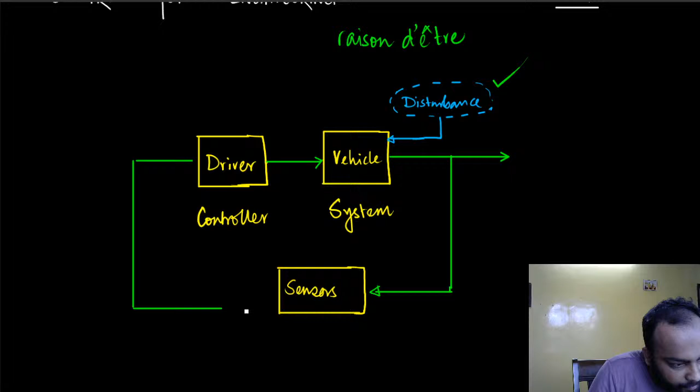How well the vehicle is behaving, where it is going, whether or not it is obeying your command, whether or not you are doing it right - these sensory perceptions will give you an idea of that, and that is what you need as the driver. So this is something you need as the driver, but there is a small problem. The driver needs to be able to see what is happening, right? That's understood. Pretty simple.

The problem is that here we do not really have a mathematical way of representing the mindset of the driver. Imagine this entire single line is representing the speed of the vehicle. So imagine the driver wants to run the vehicle at a speed of 60 km/h, and accordingly the driver would press harder on the accelerator, and the vehicle is accelerating, so the speed of the vehicle is increasing. The driver needs to keep track of the speed, and if the speed exceeds beyond 60 km/h, then the driver needs to release the accelerator pedal accordingly, so that the speed reduces. And if the speed again falls behind 60 km/h, then the driver would again slightly press on the accelerator pedal.

This kind of adjustment is possible only if the driver or the controller is comparing the output with a certain reference. These kinds of adjustments are possible only if the controller is comparing the output of the vehicle or the system with a set of prefixed values, or with a set of reference.

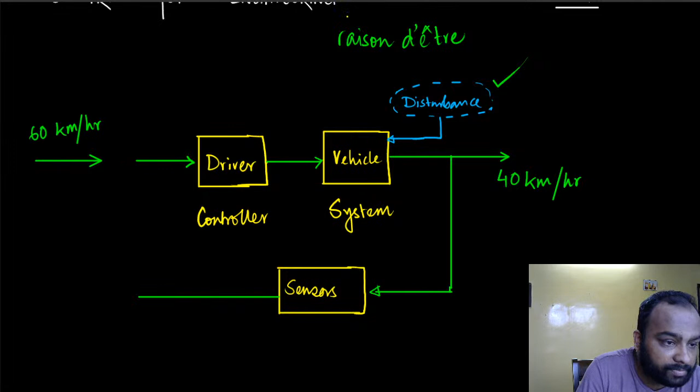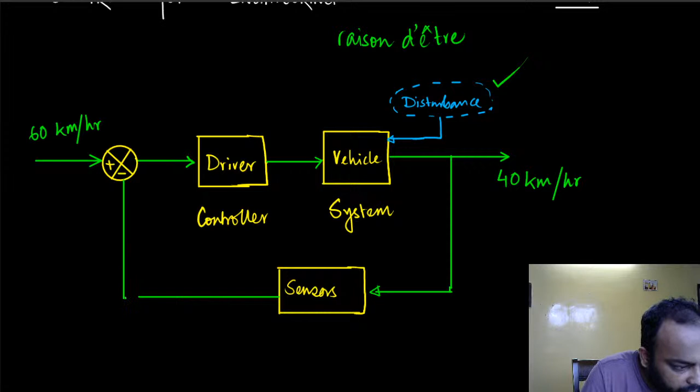But how would I know that? I as the driver would know that by simply comparing the reference value with the output. So we have a special block diagram symbol here, and this symbol is a very special symbol. It simply represents that whatever we are reading here, we are subtracting with the reference. So this is the reference value, and we are subtracting the output from the reference value. So this is plus and this is minus - that is the indicative here. So we are subtracting them accordingly.

So here apparently we would have the knowledge that my vehicle is running 20 kilometers per hour slower than how fast I want it to go. So accordingly I will press harder on the accelerator pedal - rather, the driver would press harder on the accelerator pedal. I think this is understood.

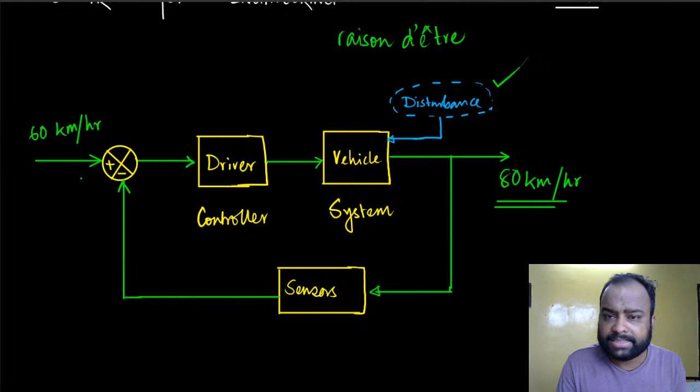If not, say for example this is instead 80 kilometers per hour, but I want to go at 60 kilometers per hour, then the difference would tell me that we have a negative change required - we need to reduce the speed. This difference here, if I measure the difference or compare the difference, and this block is literally known as a comparator - it compares. This comparator would tell the controller or the driver that I need to reduce the speed. Maybe I need to release my leg from the accelerator and slightly press on the clutch and the brake. Maybe, I don't know.

Okay, so I have to reduce my pressure on the accelerator. That's understandable, right? With that knowledge, I think it's clear that this comparison needs to be done. For the driver, this comparison happens inside the driver's head. He looks at the sensors, how fast he's moving, and he also knows how fast he needs to go. Accordingly he compares, he does this comparison inside his head. So this is a comparator, right?

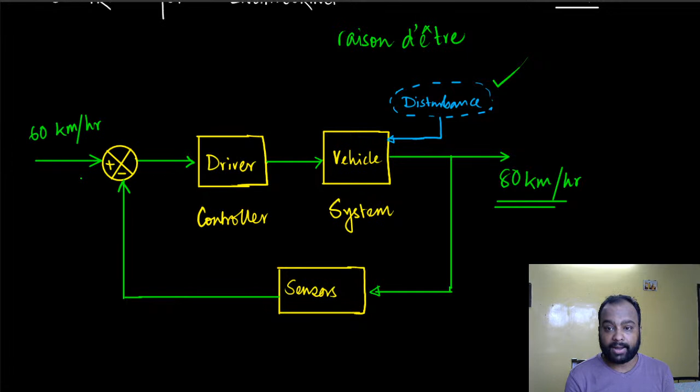This is a very simple block diagram of a control system. So let me now copy this diagram to create a more generic one.

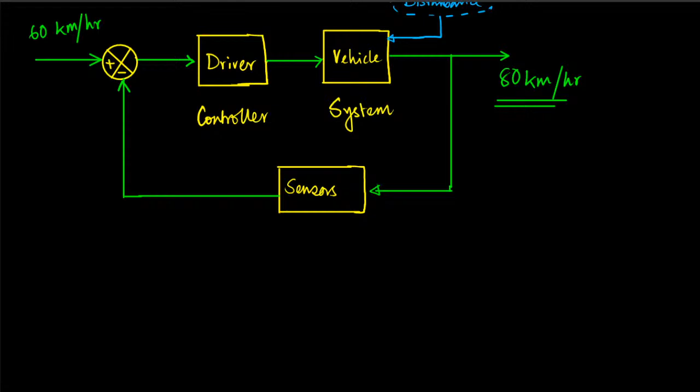Let's proceed, I don't think you have any queries. All right, so the system we are controlling, let me just zoom in a bit. The system we are controlling, we call that a controlled system.

So let me just introduce to you the terminologies we actually have. All right, so this is the controlled system, right?

All right, so the transfer function, I shall introduce to you the term transfer function, but the mathematical description of the system, let's represent that with, say, G2 maybe. So this is the mathematical description. This could be a transfer function model, this could be a state space model, this could be any other type of model. But this is a mathematical description as far as we are concerned.

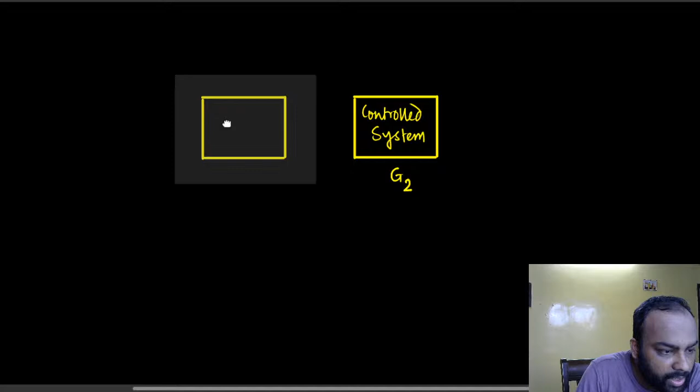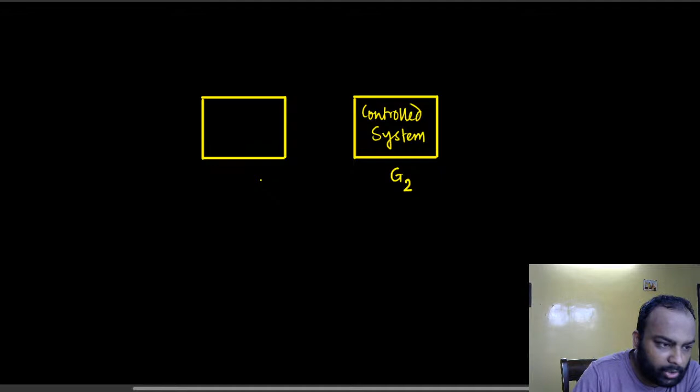Then what we have is that we have a controller, right? Instead of calling it a controller, I shall call it control elements, because a controller itself actually has several other components as well. We shall learn all those things later on, but we shall call it control elements. Let's call the mathematical representation of this, say, G1 maybe.

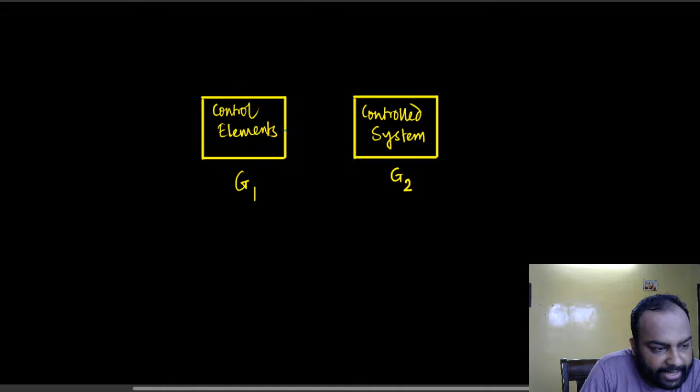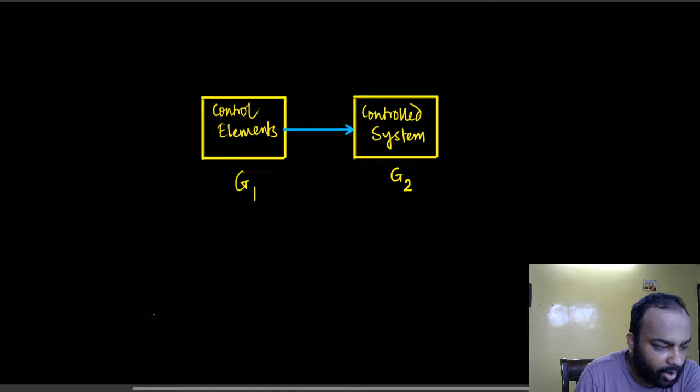And from that, this set of control elements is actually sending a signal to the controlled system so that it can actually control the controlled system. Is that understood? So this signal is being sent from the control elements to the controlled system, and they behave accordingly, right? So this is the human driver in this particular scenario, and the vehicle.

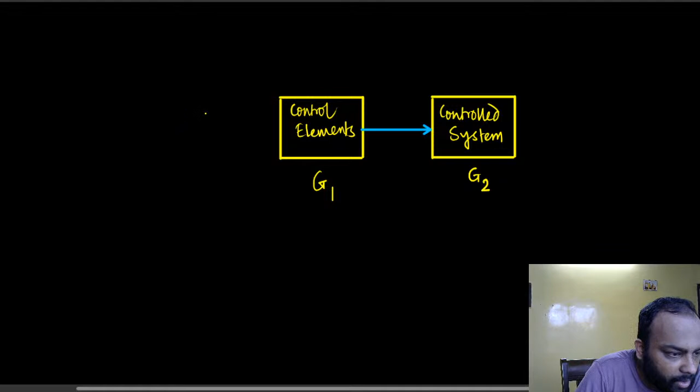Then you have a mechanism for finding the output of the controlled system. So let me just draw the output of the controlled system. This is the output of the controlled system, for example, and this output of the control system is being read by a set of sensors, right? Set of sensors, something like that.

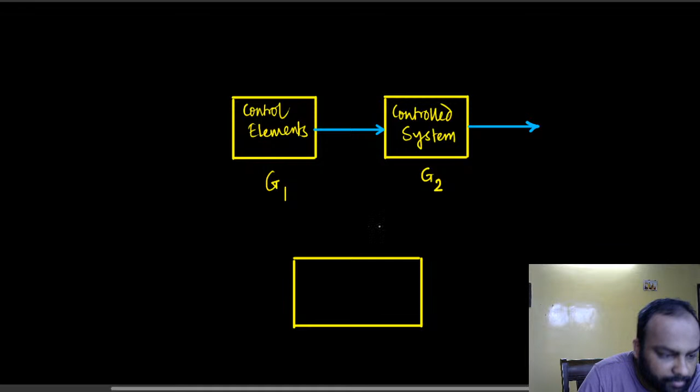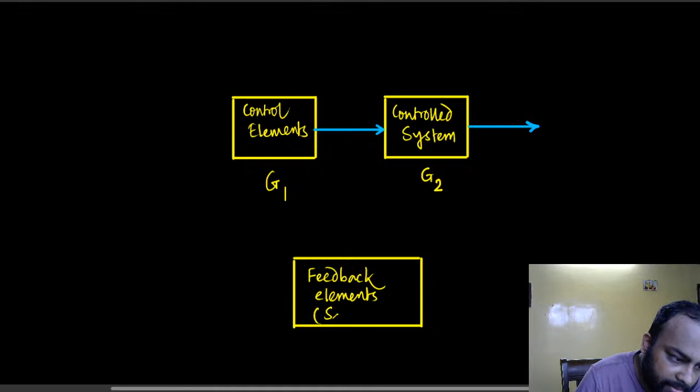So those set of sensors are going to be called, I shall call them feedback elements. Usually they contain sensors, right? So these are the feedback elements. These feedback elements would receive signals from the controlled system, right?

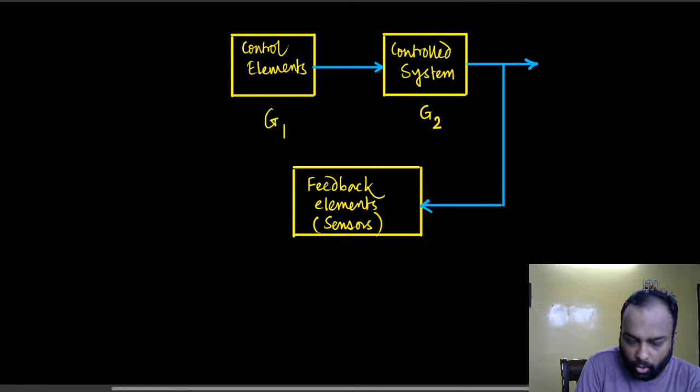So basically what the controlled system outputs is received by the feedback elements, and that is being fed back to the control elements, and it's the responsibility of that part to compare what we get from the feedback elements and what we want. So we have something called a reference input.

So this is the reference input, and this reference input is being compared with what we get from the feedback. Just like our previous example, we have a plus, we have a minus here, okay. So this is basically a comparison happening. This comparison, what we get after the comparison - so this is the reference and this is what we have from the output of the control system - actually goes into the control elements.

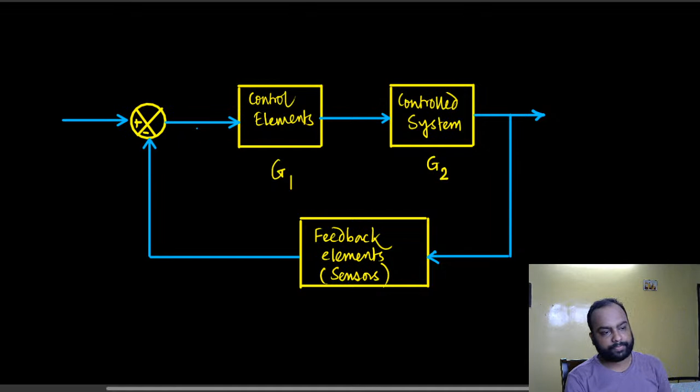All right, up to this part I think is understood by you, right? Now often what happens is that we do not really have a reference input as such, right?

So try to understand, think about the human driver here. For the human driver, in our example, the reference input was a certain amount of speed at which you wanted to move. So the reference input was a certain amount of speed, right? But try to understand that in your mind you have an idea about speed, and that is being somehow translated by your brain into a certain comparison with what you get from the feedback elements.

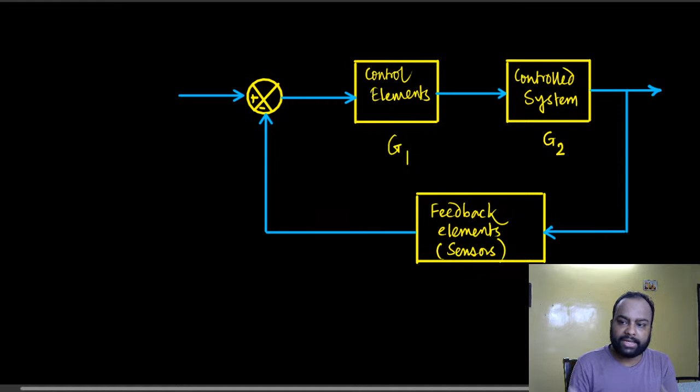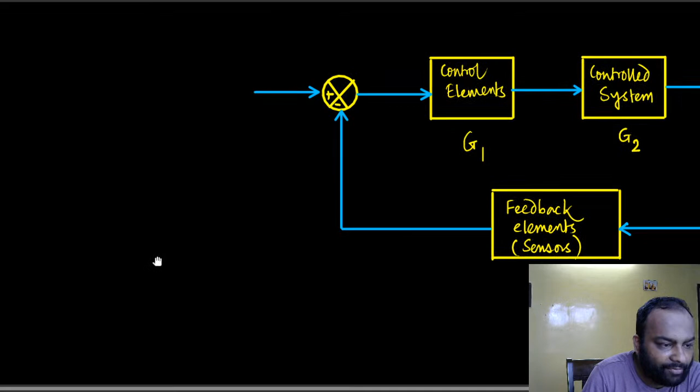How fast you want to move is an abstract idea in your brain, and that abstract idea needs to be materialized into a certain numerical value. So what you essentially have, instead of this reference input, is a set of commands that are in your head. The command would be something like go faster, or maybe go slower, something like that. This kind of command is something you have in your mind.

And from there you are generating the reference input. So you are generating the reference input by means of having some command inside your head. The command could be go faster or go slower, something like that. So let's write down the names now. For example, this is called the command signal, represented with V. It's a good example for our purpose because we are considering the velocity or the speed to be our command signal.

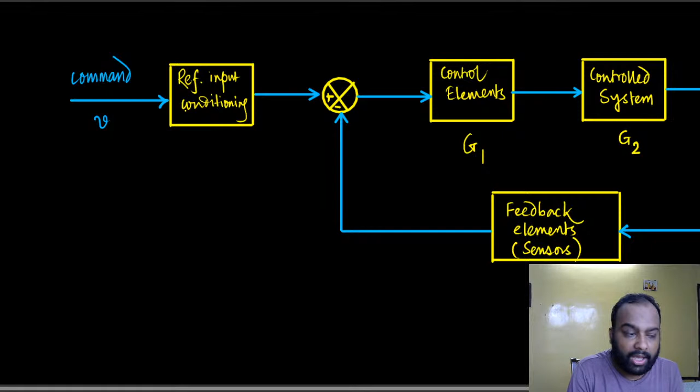And this block here is a system. It's called the reference input conditioning elements, or rather reference input conditioning, a set of reference input conditioning elements. What signal this one generates is the reference input. So this is the signal we call the reference input. Let's call everything with capital names. So this is V, and the reference input itself is called R.

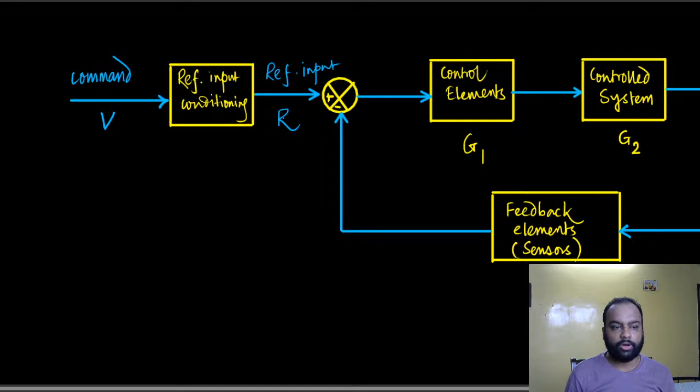Of course this is called the output of the system, the controlled system's output, but in our control system nomenclature this is called the controlled variable. The output of the controlled system, for our example it was the vehicle, the output of the vehicle would be called the controlled variable, or controlled variables for that matter. So this output is actually the controlled variable, the output of the system.

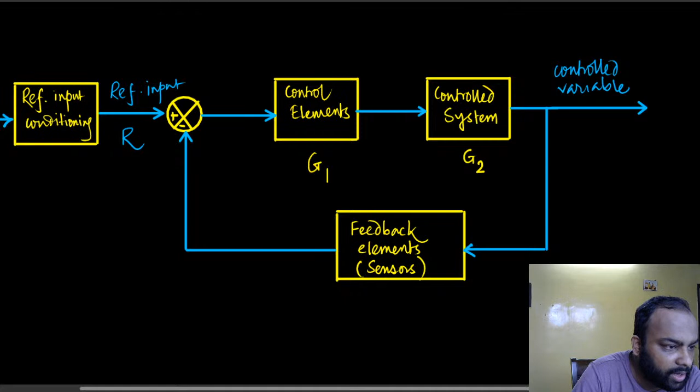So this controlled variable has a name. We usually call this C. So this controlled variable is again the output of the controlled system. This is being received by the feedback elements.

Now feedback elements would have a transfer function or some sort of a mathematical model, could be a state space mathematical model or something like that. We call its transfer function or its mathematical description H. This is again standard nomenclature. And the output that we receive from the feedback elements, and again feedback elements would include your eyes, your ears, the entire display panel of your vehicle, everything, we call that the feedback signal.

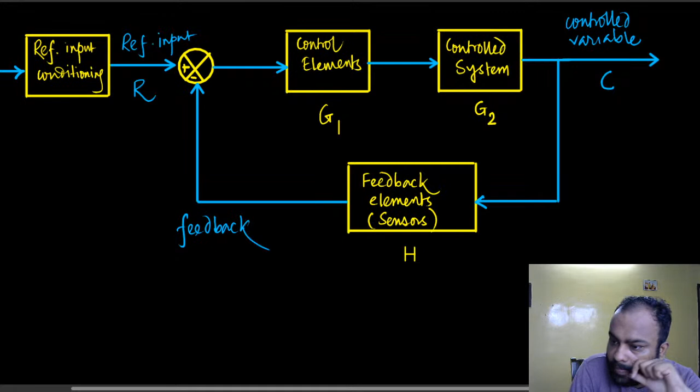So this is the controlled variable, and after going into this, what we have is the feedback signal. So this signal is the feedback signal, and the feedback signal is called capital B. Understandable, right?

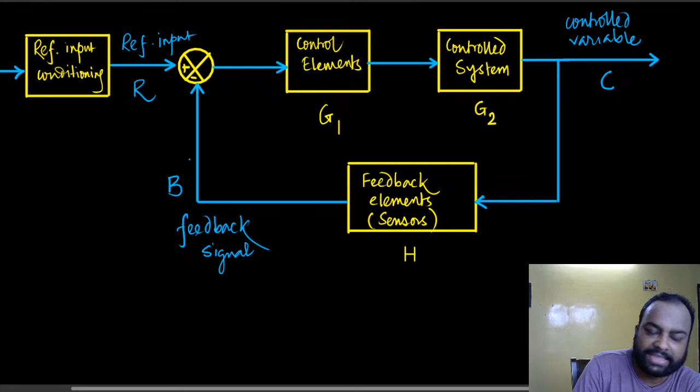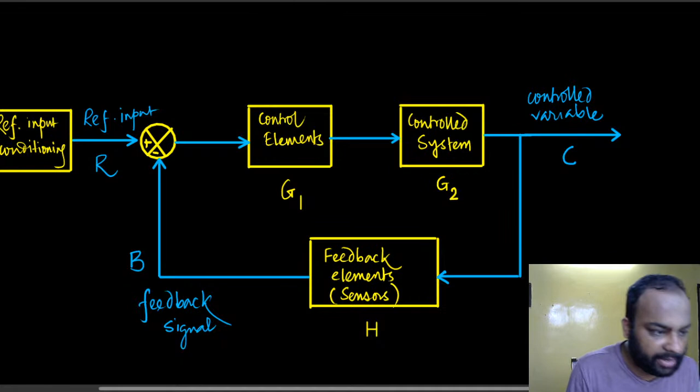So this comparator is comparing the reference input with the feedback signal. Comparing means just subtract them, so that gives you the difference, how much you are yet to go, or how much you have to release. So this is basically a subtraction, simple subtraction. Comparison means subtraction in this particular scenario. So this difference between the reference input and the feedback signal is called the actuating signal. This signal that we have here out of the comparator is called the actuating signal.

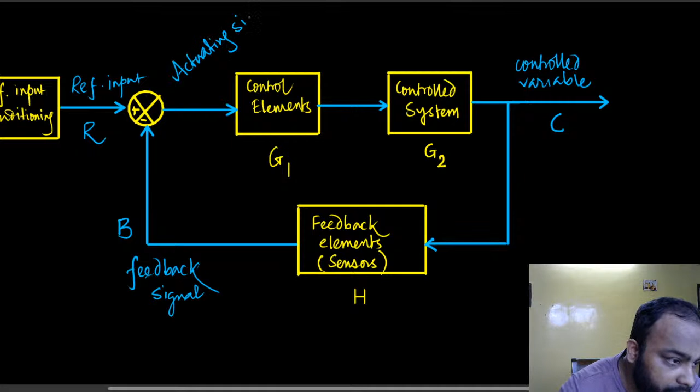This signal that appears here is known as the actuating signal, and it has a symbol of E. Now it has a better name. This shows you how much you still have to go or reduce in terms of your reference input and the control variable. So what is the difference between what you have and what you want? That difference is known as the error signal, often called an error signal. So I would rather call it the actuating error signal.

Actuating error signal. And since this is the error signal, we have a name E. So the actuating error signal is the difference between the reference input and the feedback that we receive from the feedback elements, and that actually goes into the control elements, namely the driver himself or herself.

Now based on whether I have to go faster or slower, this will tell me the difference between how fast I want to go and how fast the vehicle is currently moving in our particular example. Accordingly, the driver will decide whether to press harder on the accelerator or release it. So the driver receives a signal, and that signal is the difference between the speed at which the driver wants to travel and the speed he is currently traveling at.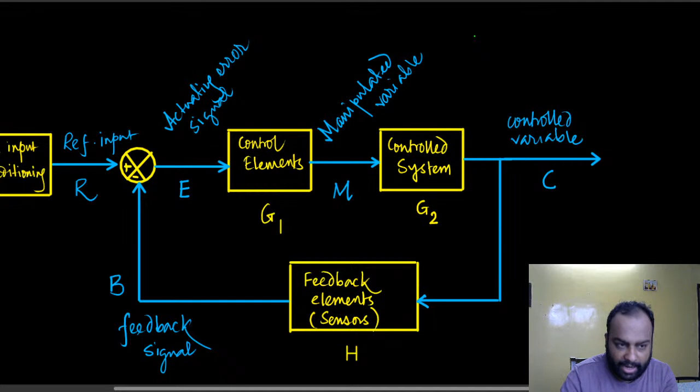But always keep in mind that none of these would be there if there wasn't any disturbance. The disturbance is all those non-idealness in the scenario. Everything that is non-ideal, from the perspective of the control system, can be considered a disturbance. So for my particular scenario, this is disturbance, and the disturbance comes externally into the system I am controlling.

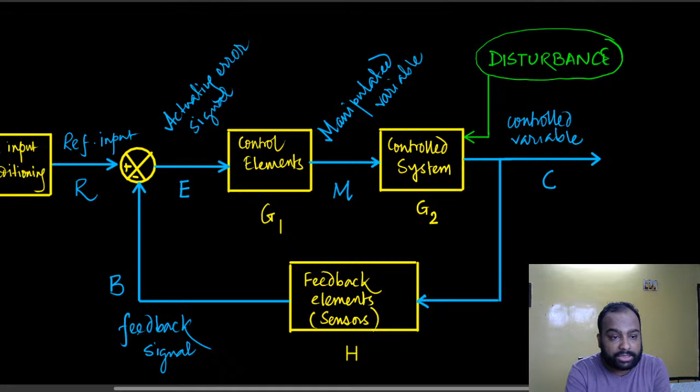This is a very important point to note. Again, all these control elements and feedback mechanisms need to exist simply because there is a disturbance. Nothing is ideal in nature. So the disturbance is actually feeding into the control system. We call that capital D.

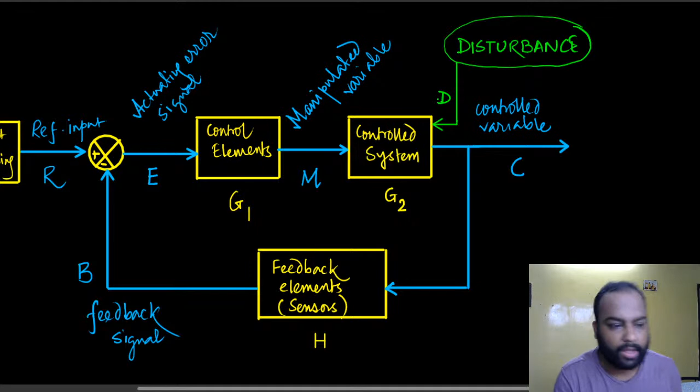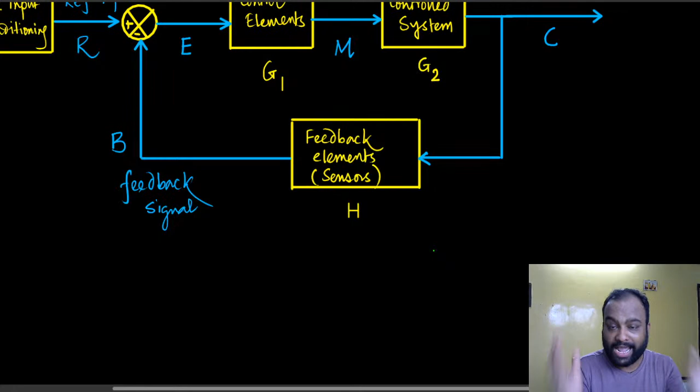But along with that, there is something else. You might have heard these terms, disturbance and noise. Often what happens is, and this is mostly the fault of the teachers, many teachers would teach you that disturbance and noise are the same thing, and you would get this kind of wrong idea. But the point is, these two terms, even though they have similar meaning in English literature, they have completely different meaning in engineering.

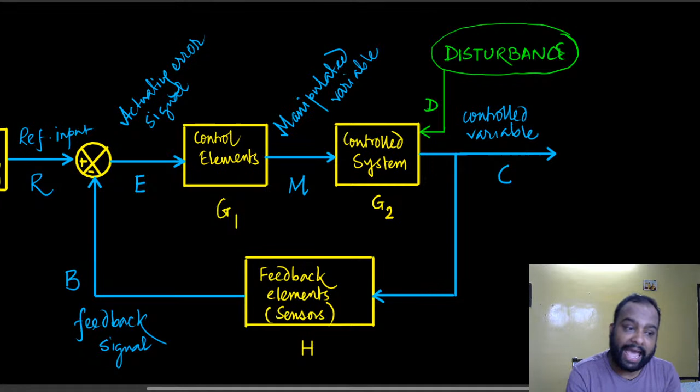They do have completely different meaning in engineering. Disturbances are those non-ideal situations that affect the controlled system. But noise is what we get in the measurement system. So if I say noise, it is what we get into the measurement system. Which one am I calling the measurement system? The measurement system is the feedback mechanism.

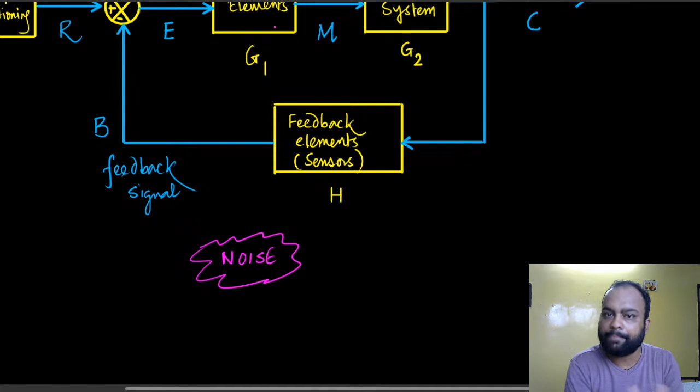All the sensors are measuring how fast the vehicle is moving, which way the vehicle is moving. All these things that are being measured come from the measurement mechanism or measurement system, namely the feedback system. So the feedback system is the measurement system, and the noise actually comes into the measurement system. The noise is represented with capital N.

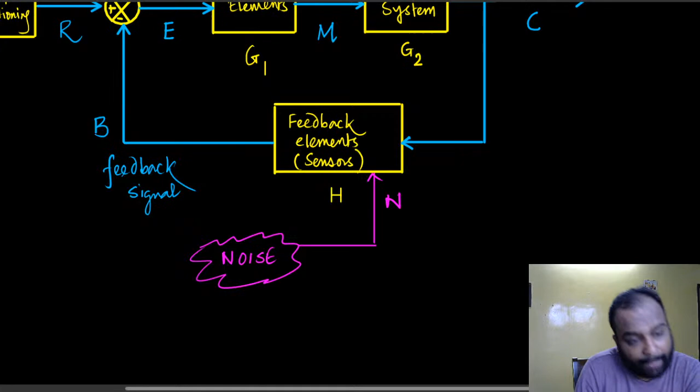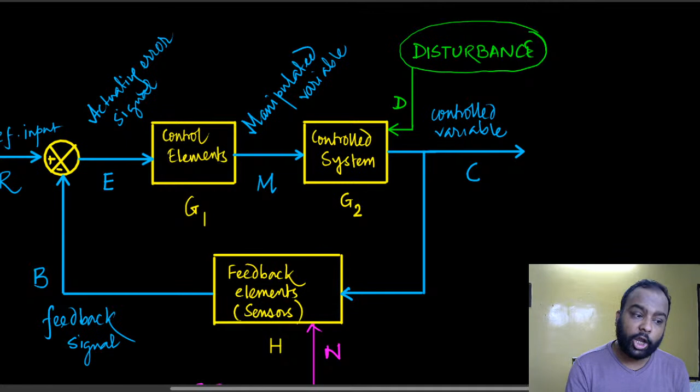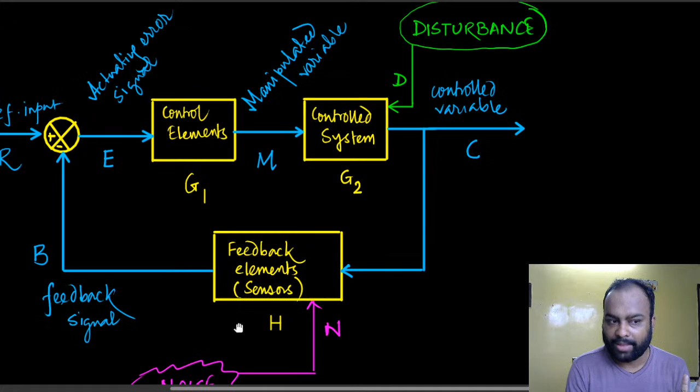So although the English terms disturbance and noise appear to have the same meaning, they are two completely different things as far as we engineers are concerned. Disturbances are those non-idealness that affect the control system. In an ideal world, you would not have disturbances whatsoever. But in an ideal world, you also won't have noise, simply because you would not need these feedback elements. If there was no disturbance, there would be no noise, simply because I would not need to measure anything. Everything would be so perfect that there won't be any noise either.

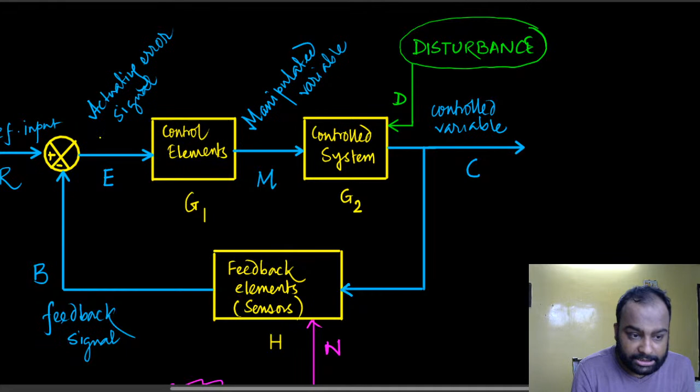Not because there wasn't any noise, but because we do not need to measure anything in an ideal world. But since nothing is ideal, there are non-idealness in the environment and in the system itself. These are modeled as disturbances. And because we have disturbances, we need a feedback mechanism. We need to measure things and take care of the actuating error signals. And because we are measuring things, there might be some measurement noise. This is called noise.

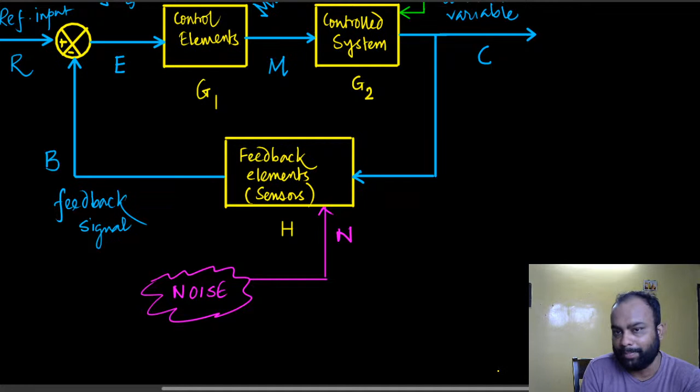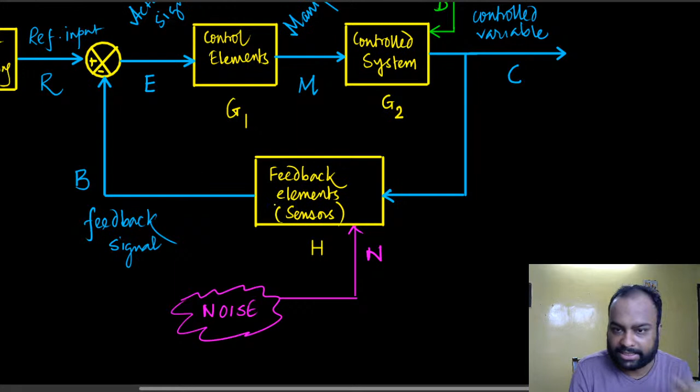So this is the difference between disturbance and noise. Let me repeat: disturbances are non-idealness in the system and environment that affect the controlled system, and noise is associated with the measurement or measuring equipment, the sensors. Those noises are random fluctuations in the signal we measure, modeled as noise associated with the sensors or measuring elements.

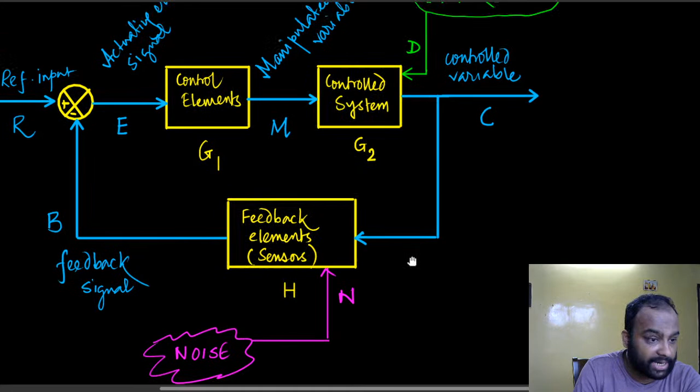I think this much is fine. If you have any query, feel free to ask right now. So now try to understand.

Again, the same vehicle terminology. If you drive a four-wheeler backwards, what happens? Automatically certain lights will glow. If you hit the brakes, certain lights will glow. But do you have to manually make them glow? My point is no.

If you are hitting the brake, automatically the red lights behind your vehicle will glow, to indicate to the vehicles trailing you that you have pressed your brake. So those kinds of systems are automatically controlled based on what you are doing. You are not directly controlling those brake lights. Those equipments are indirectly controlled based on what your vehicle is currently doing. If your vehicle is backing up, it will play a certain melody, something like that. These things are automatically triggered based on what your vehicle is doing.

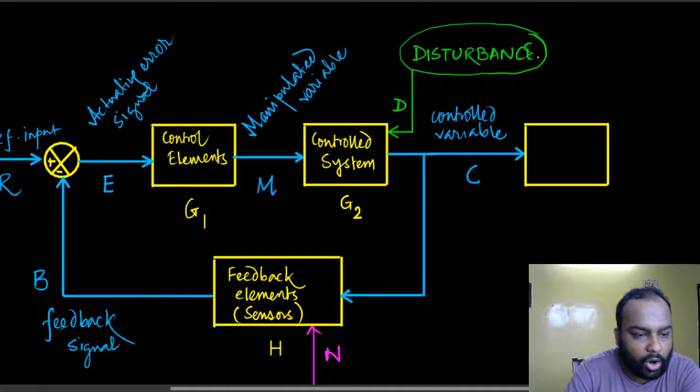So this kind of terminology is known as an indirectly controlled system. Now, based on the control variable, these indirectly controlled systems are controlled. You do not directly control them based on what your vehicle is currently doing.

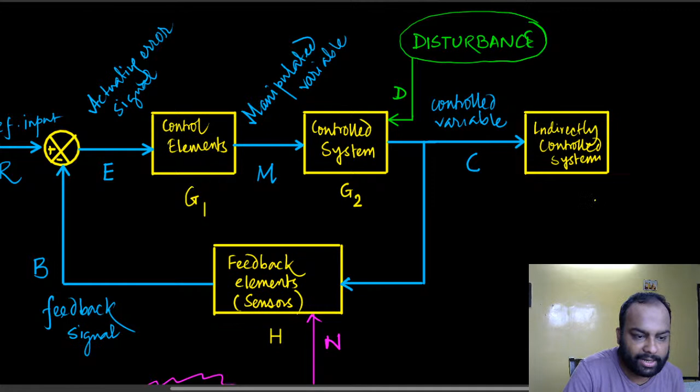Sorry, it should be in this color, because this is a system. Just keep in mind, all the systems are represented by yellow, and all the other colors are used for the signals. Again, this is a sequel to signals and systems, so our ideas from those classes will be directly applicable here.

When the lights are turned on and all those things, we get to see their outputs, and those outputs that we get from the indirectly controlled systems are called the indirectly controlled variable. So this was the controlled variable that came from the controlled system, and this will be called the indirectly controlled variable.

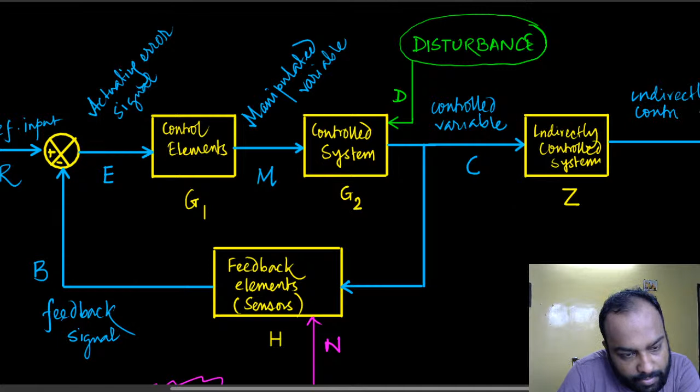And this is represented with Z. Again, this is a very standard terminology. My point is, you need to know all the standard names.

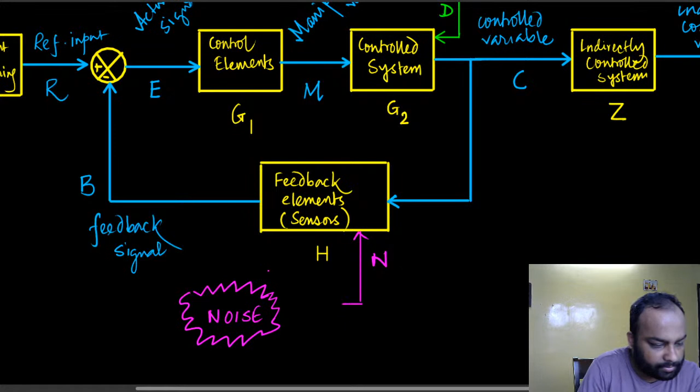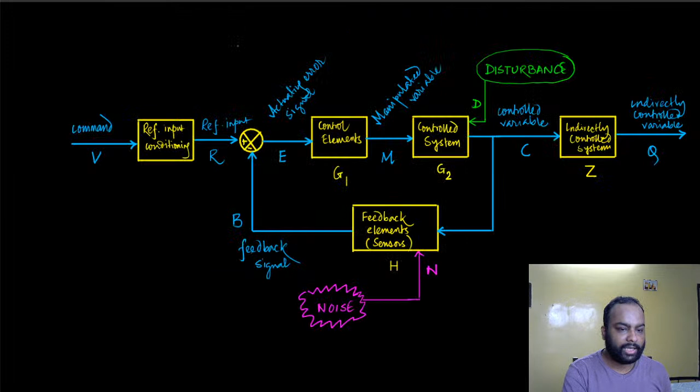So that is what your control system is. This is the standard control system topology, rather a standard representation of control systems. So in any control system, these are the portions that we actually really talk about.

And of course, every single block I have here, like the control elements, the control systems themselves, the reference input conditioning, this is called P, the reference conditioning system, represented with P. So all these parts can also be subdivided into subsystems. They have certain subsystems within them.

Is that understood? So again, I've given you all the particular names of different things, and the mathematical description of different things.

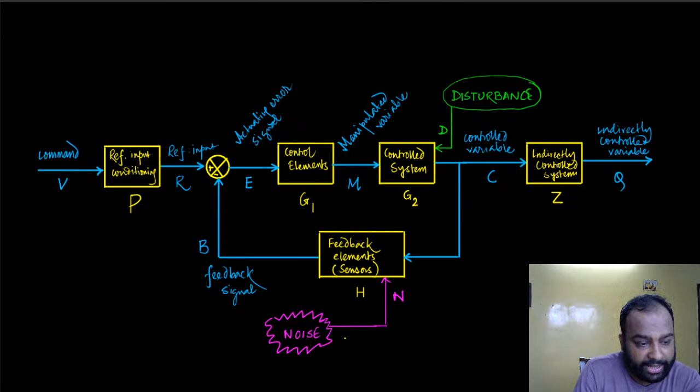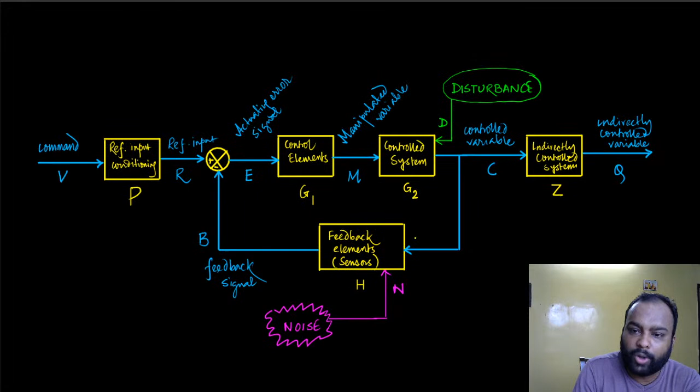Now, very important here. Whatever we are showing with these different inks, like these blue ones, these ones, these are all signals. But also, along with any control system, we need to have a mechanism to feed power to the system. So practically, you would have a mechanism to feed power to the system. Let me just hold on.

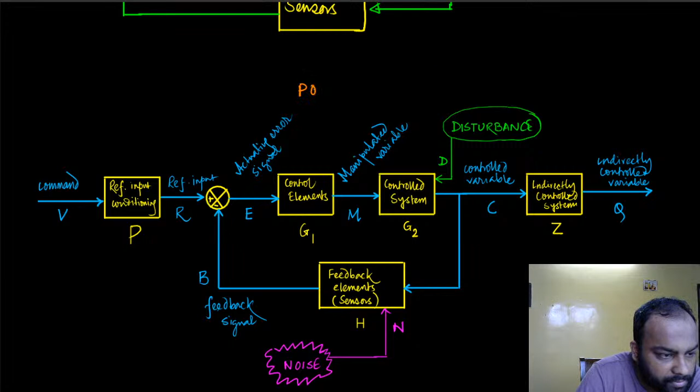Someone is asking, can we consider noise to be a subset of disturbance?

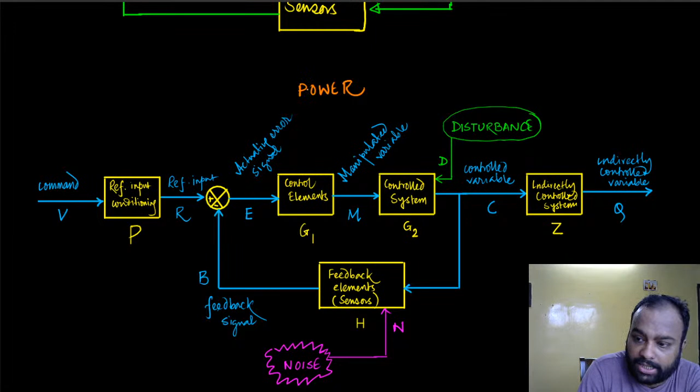No, actually, you cannot. Disturbance is a completely different term, and the difference is in how we model it. Disturbances have deterministic mathematical models. The answer is no, absolutely not, because how they are mathematically modeled is quite different.

Disturbances are mathematically modeled in a deterministic way. What I mean is, if we can model the disturbances, we would know the reasons behind them and be able to figure out how they would probably change. For example, if my car falls into a pothole, we would be able to model that change deterministically.

But unfortunately, noise would be random signals that get added up with our sensors and measuring equipment. So how disturbances and noises are modeled is quite different. By that definition, disturbance and noise are two completely separate things. They may have certain correlation between them, but you cannot call noise a disturbance or disturbance a noise. They are two completely different things, mostly because of their behavior.

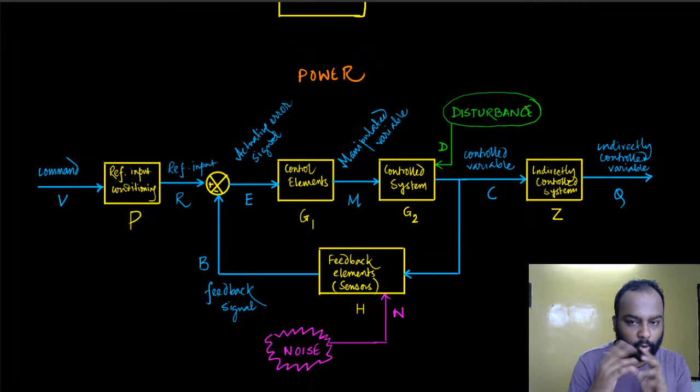You try your best to eliminate noise, but you don't try your best to eliminate disturbance, because that is in the very nature of things. So we try our best to cater to the disturbances and eliminate the noise. Disturbance and noise are two very different things, both in how they are mathematically modeled and whether or not we want them to be there. We want to eliminate noise, but we cannot eliminate disturbance, because if we could, it would mean we are living in a perfect ideal world, which we never are. So we try our best through our control mechanisms to cater to the disturbances and remove the noise. Understood?

Again, good question, very good question. As I said, disturbances are the raison d'etre for the control circuit. The control circuits exist because there is disturbance. If everything was ideal, the control system would not exist at all.

So the power system actually feeds everything. We would have a power system that would feed power into the control elements, and feed power to the controlled system itself.

For example, in a vehicle, you would have batteries, you would have an engine. All those power systems would feed power to the reference conditioning circuit, and also feed power to the feedback circuit as well. So the power circuit actually feeds power to everything.

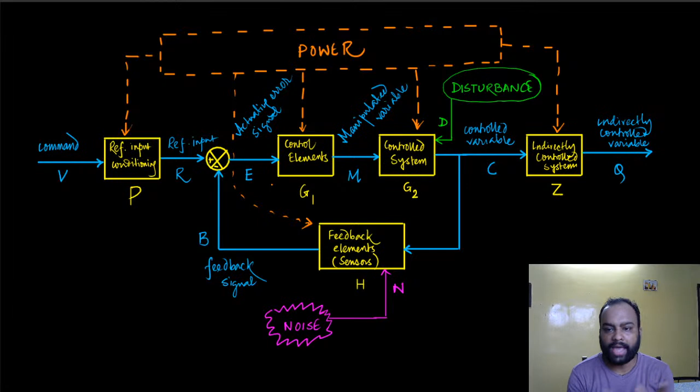The power system would have different power levels, like an auxiliary power level, like a main power level, and everything. But the point is, everything is additionally fed with power. For our control system classes, we will not talk about power, because that is for the electrical engineering domain, taught in your power electronics classes. Anyway, if you have any query, feel free to ask.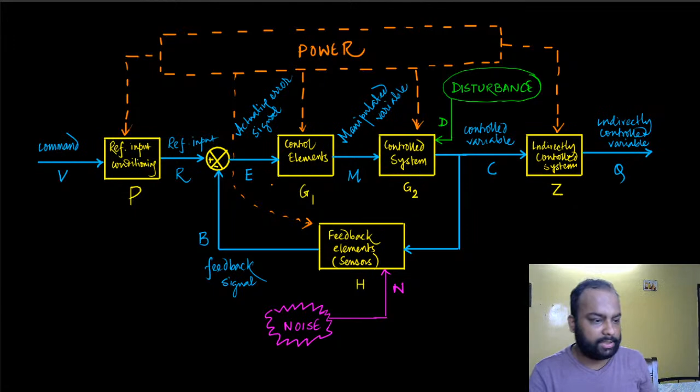So that's a comprehensive introduction to control system engineering, why we need control systems in any practical situation.

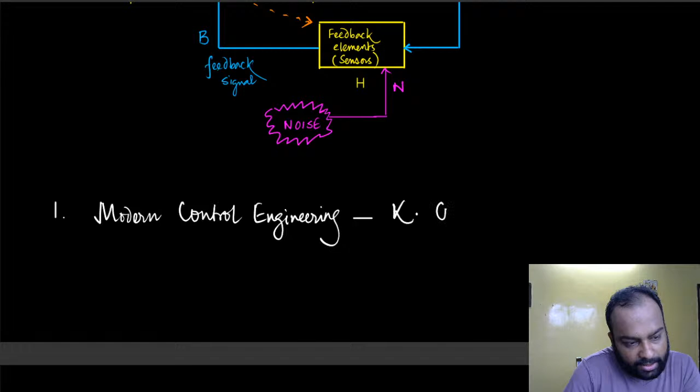Here is the name of the book. This is pretty much the standard book. You should not be reading any other book. This is the only book you should refer to: Modern Control Engineering. This is the de facto standard book by Katsuhiko Ogata. He's a professor of mechanical engineering in University of Minnesota, and this is pretty much the standard.

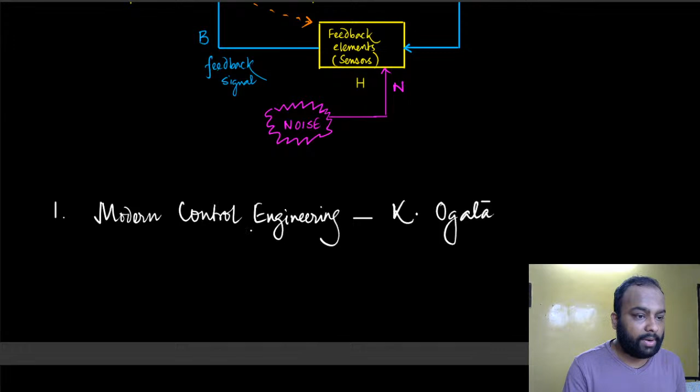Someone is asking if there is any signal loss, then what happens to the system? So question is, if any of the signals in any one of these is lost, what happens?

Then we have a catastrophic failure. For example, if somehow there is a breakage in this, if this one breaks, then we have a catastrophic failure, because the manipulated variable is no longer being received by the controlled system.

So you would probably have fail safes. If something goes wrong, you probably want your vehicle to stop rather than go ahead with full speed. So you would have a fail safe to cater to those situations where something fails. If any of the systems fail, you want your vehicle to stop because your life is more precious than your vehicle.

If any of the signals are failing here, you have a failure - the entire system fails. But imagine an aeroplane. You are in the middle of the sky, and if some of the parts fail, what would happen? Can you just stop an aeroplane right in the middle of the sky? You cannot - it's not like a typical vehicle.

So for those systems, you would have redundancies. In an aeroplane, you would have multiple sensors doing the same thing, so these feedback elements - the sensors - are redundant. If a set of feedback elements actually fail... and this really happened. Let me tell you a story.

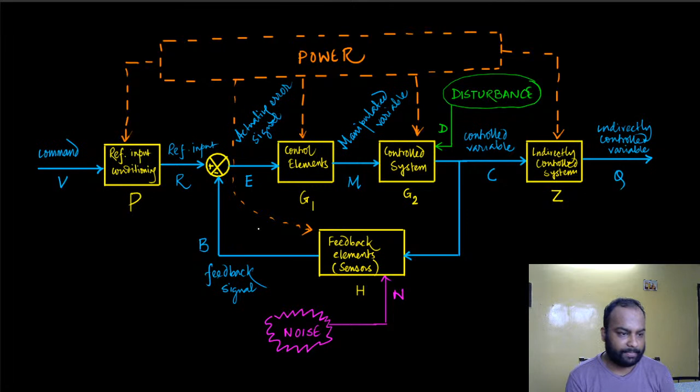Again, ask any question that you might have. And this is the book, please follow this one and nothing else. This is the standard book, the most followed book in control system engineering, UG control system engineering. So if you have any question, feel free to ask.

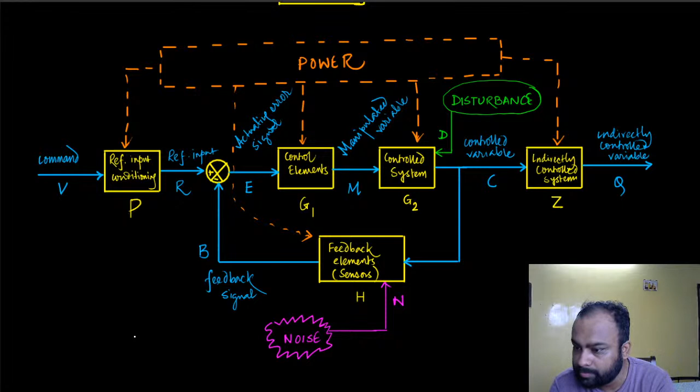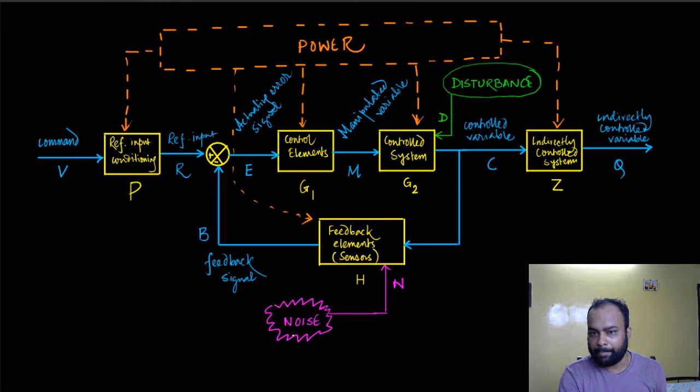Someone is asking why the human mind is not a system. I think this is a reference to one of our questions from last semester. A system per se is defined by two properties it needs to satisfy in order to qualify as a system: it needs to have a well-defined physical or logical boundary, and it should be able to interact with qualifying signals.

What is a signal? A signal is a waveform that carries some information. So a system should have a well-defined physical or logical boundary, and it should have a well-defined behavior, or rather a well-defined way in which it interacts with external signals. Now, the human mind is not a system because it probably does not have a well-defined physical or logical boundary. Human brain is a system, but human mind is a psychological term. Understandably, this does not have a physical or logical boundary, and it does not have a well-defined behavior to qualifying input signals.

If I say something to you now, you would behave in a certain way, and if I say the same thing to you maybe two days later, you might behave differently. So your mind behaves differently to the same inputs. That way, you don't have a well-defined behavior to external inputs, giving the same input might not produce the same result, and no one can ensure that. Also, you don't have the boundary.